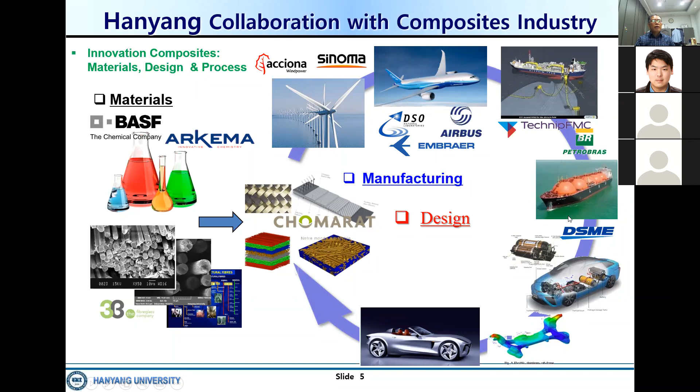Now Embraer has been merged with Boeing. Also, Petrobras is a Brazilian company - a huge company for oil and gas applications - and Technip. These two major companies are typical users of these large, long, flexible risers. They're called risers because they raise the oil and gas up - very interesting structures. And DSME, also Plastic Omnium and Bosch and Hyundai - these are typical examples in industry.

Well, this is just a short list of companies, but you can easily find more of them on the internet.

So here I'd like to emphasize three aspects: understanding materials, understanding design, and understanding manufacturing. In our class, as the name indicates, we will mainly focus on the design of composite materials. But to design composite materials applied to many different applications, we need to understand the behavior of materials and the manufacturing aspects. Otherwise, we cannot fully design. So please understand these three aspects.

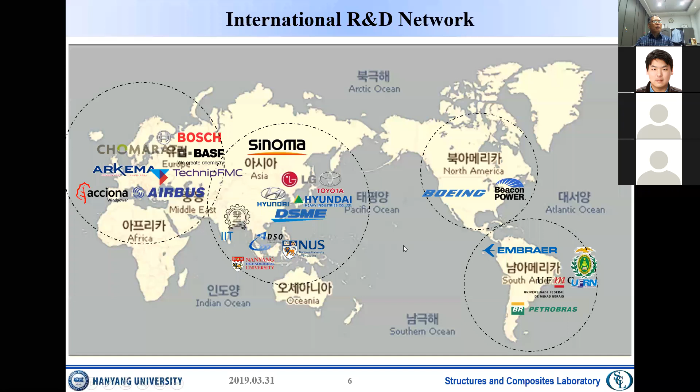Now, globally, I just want to indicate how these companies are located all over the world - Hyundai and some companies in Korea, some companies in Europe like Germany and France, Boeing especially in North America, United States, and Embraer and Petrobras in South America, mainly in Brazil. So I just like to give you an idea of how we work with companies all over the world.

Now in Korea itself, we have many companies covering resin suppliers, fiber suppliers, pre-forming and product developers and manufacturers - each color represents a category. For resin companies, some of the most typical in Korea are Kukdo, Kumho, Kolon, SK, and Lotte Chemicals - these are major chemical companies. In Korea, chemical engineering has been one of the very strong areas in Korean industry, so we can find many chemical companies that can produce engineering plastic applicable to composite materials.

And also as carbon fiber suppliers, Hyosung and Taegwang - Taegwang is a very old company, but unfortunately they didn't continue with fiber. Toray is a Japanese company, but one of the largest in the world.

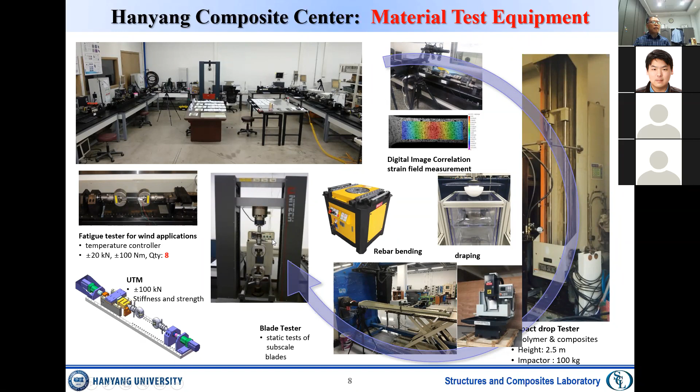We also established some models to predict such behavior, and we do some impact testing using drop weight, some fatigue testing, and also typical UTM machines. And another one is the manufacturing facilities.

The lab has a space of 750 square meters with a very high ceiling height, with CNC machines and a compression molding press. One of the most typical machines is the winding machine, so that we can manufacture pressure vessels by winding, and some infusion process.

We hope to learn these manufacturing facilities one by one, again, to better understand and better design composite structures.

Now, a very important aspect of our composite center - not just for our center, but design simulation tools will play the most important role in the design process, where we need to understand physical behavior, but we cannot design structures every time we design. We need to use tools by understanding the physical behavior. So in that sense, we have three categories.

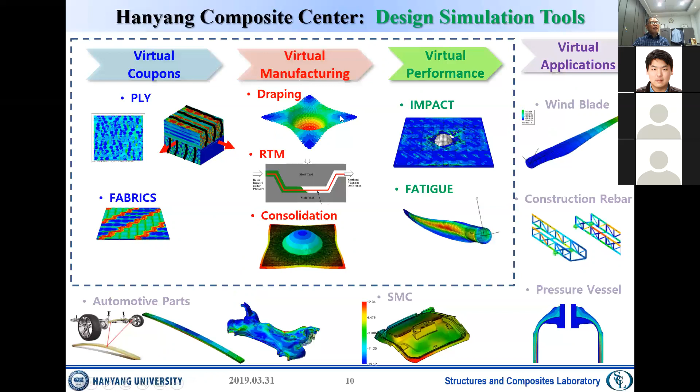Okay, let's move on. We cannot cover all the applications, but I'd like to introduce a few examples using research we have done with industry, from a long time ago, more than 10 years ago. This is one of the most typical applications of composite materials.

This is one of the very interesting and very challenging tasks in composite history. This technology has been developed and transferred to a company called Beacon Power, which is still using this technology now.

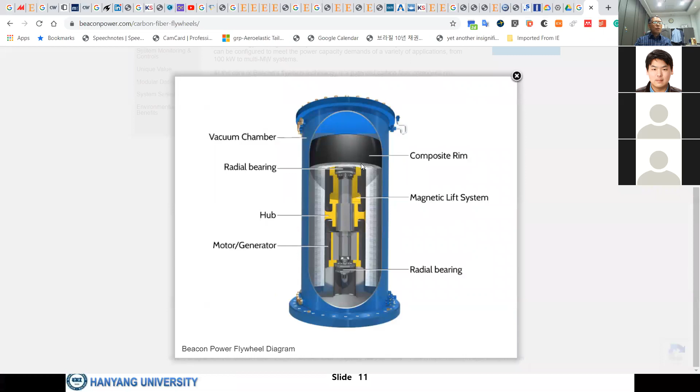Speaking of Beacon Power, I just pulled up their website. As you can see, Beacon Power is using this rotor to store all kinds of energy. It says carbon fiber flywheels, and as you can see, this is exactly what we developed. We transferred all the technology to them, and they are using this rotor to store energy and apply it to grid balancing - meaning that these days all energy has to be balanced.

In other words, let's say they have this kind of huge storage plant - each container has many rotors like that, so it's a huge park, like a big lithium-ion battery stage, equivalent to a lithium-ion battery. So when you have energy, you store it like a battery, and whenever you need that energy back, you can get the energy back.

This is very stable and has literally unlimited life. A lithium battery has a limited life, but this flywheel has no limit.

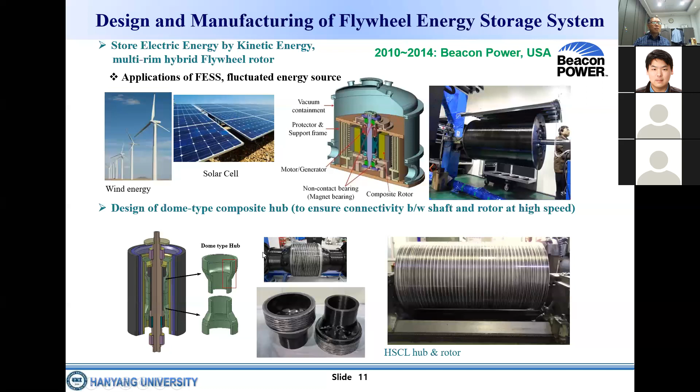So this is how we collaborate with industry. We work and develop a very challenging task so that the industry can use our technology, and they contribute to our society. So our researchers contribute to global society as a result.

There is also another different form of composite called braiding. Braiding is how we braid the fibers, making some closed form like a tube, and these kinds of braided structures are very strong under impact, known as one of the strongest structures in composite structure.

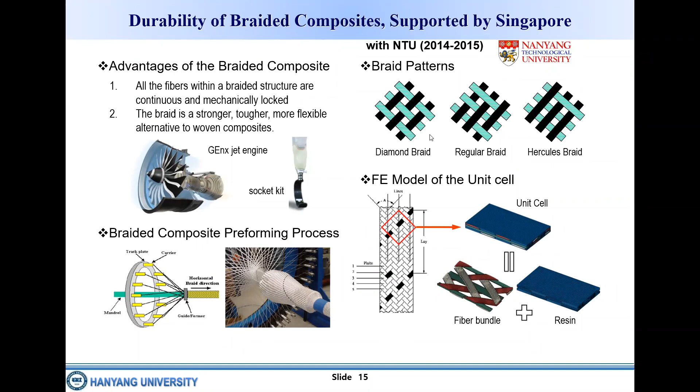I'll find and share later. The main reason why this braided structure is so strong under impact is the way their tows interlock between each other, and there are many different patterns, and these patterns make them very strong.

So we need to simulate and predict the behavior of the composites. That's one of our major contributions. For that purpose, we understand the behavior of fibers and resin and their interface, called sizing between the fiber and resin. All three ingredients play a very important role, so we understand each component and layer.

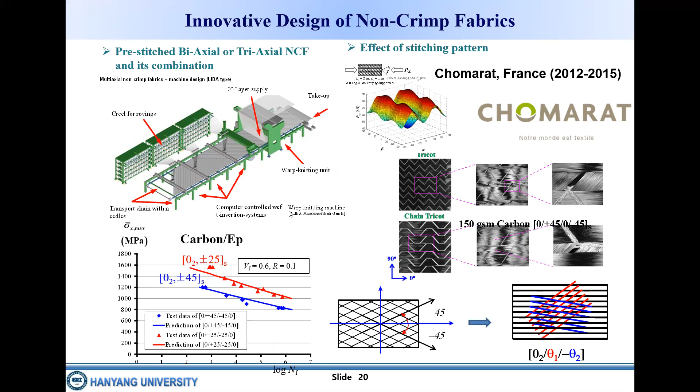Arkema is also a resin supplier, and we've been working with them for many different applications. Also, Technip FMC is developing flexible oil and gas risers, deeper and more cost-effective. The pipe is huge, as you can see. These are very interesting applications, and some Korean companies would like to enter this industry. I hope we have more chances to introduce this kind of structure.

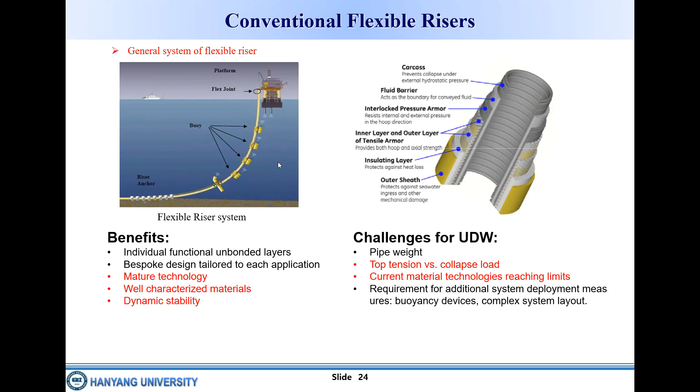Briefly speaking, way down, like 3,000 deep, you can imagine how much pressure from the outside and how much pressure inside. Inside means the gas and oil has huge pressure, and a lot of heat applied inside, and externally a lot of pressure due to the water depth. The oil and gas has to be raised to the top, and this pipe, considered as a long beam, has to be very flexible, but still very strong. There are many different types of form, and computer simulation-wise we have many complicated models, but this way is so complicated with lots of numerical problems.

So we developed an analytical solution and approach, and developed it as a design tool. Speaking of oil and gas applications, offshore applications, we don't only do flexible risers—we have many different applications, like long wires and pipes and some platforms and so on. Again, the main reason we need to use composites is that corrosion-free composites never get into corrosion.

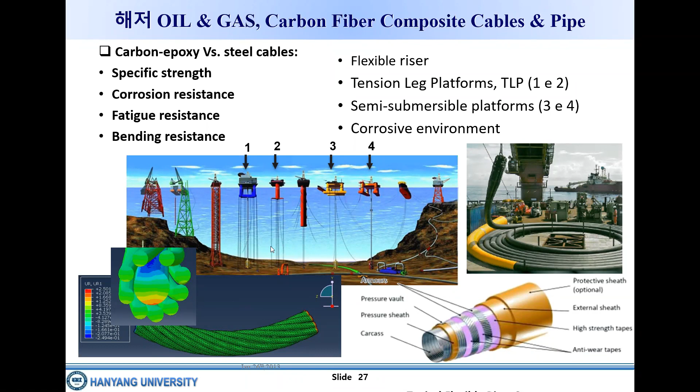Also, one of the interesting applications of composite material is in bio applications. This is one for the spine—our body and spine. We have a disc, and this disc can be easily ruptured, and we feel a lot of pain.

At that time, as a patient, I wanted to develop this artificial disc. This design, as you can see, is made of fibers and made of fiber-reinforced nucleus as a core. Under pressure, this core is expanded and surrounded by these fibers, so it really works like a real disc. This artificial disc at that time replaced existing metal types, and was very successful.

So we had a patent, we started a company, and we raised $40 million, and at that time another 60 million, so about $100 million investment. Very successful applications—I'm very proud of these applications and their contribution to our society. As you can see, you can find more applications.

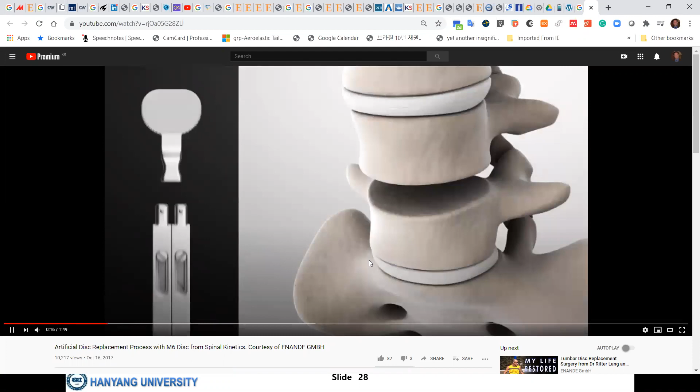Again, you can easily find more examples and applications of the artificial disc, even on YouTube. As you can see, this is your lumbar, and this one is easily replaced. You can measure the size of this disc, and you measure the mobilizations, and there are many different ways to measure that.

Before you insert them, you need to open up, and then you lift up—this is a kind of front side. This is the back—the backyard is here, is the back. This disc is now inserted from here, an anterior approach, meaning the front side. This is the back side, by the way.

This video demonstrates how surgeons operate, how to insert this artificial disc into a real body. You can have some kind of rails so that this disc can easily plug in, and then the bone will grow and fuse top and bottom. This disc insert applies to both cervical and lumbar regions.

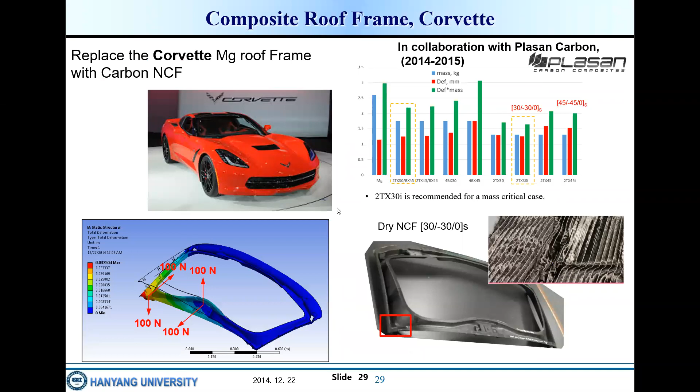Okay, let's move on. Another typical application of composites is the roof top, and we've been also working with Hyundai for many different applications.

When we develop a certain part of the automotive, we need to understand how the whole structure behaves. So when we replace only the roof, we need to simulate the whole structure's twisting and bending behavior, and understand the role of the roof in overall stiffness. The main issues were how we select materials, how we optimize them, how we apply them to the chassis, and durability and cost analysis.

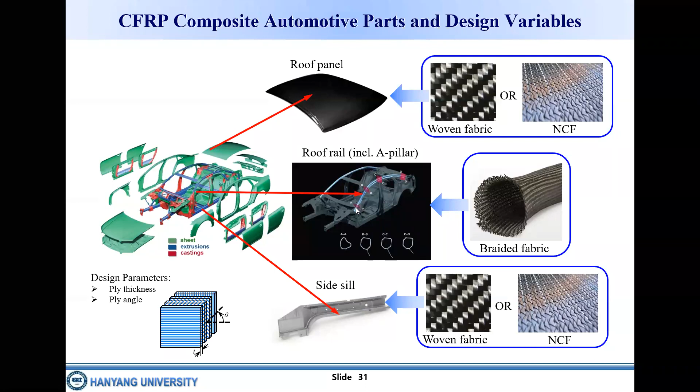These are the roof panels using woven fabrics, NCF, and braided materials as I described. This was Hyundai's first project developing this kind of application and design. Very importantly, when we develop composite parts, we need to consider the cost of the part when it goes into mass production.

So together with technical development, we need to consider the cost of composites. Otherwise, at the end of a successful development, we cannot turn it into mass production simply because of cost. We don't want that to happen. We also apply this to aerospace—imagine how complicated it is. This is the joint between the fuselage and the wing, showing how they are connected: very complicated structures, but also very strong and very light, replaced with composite.

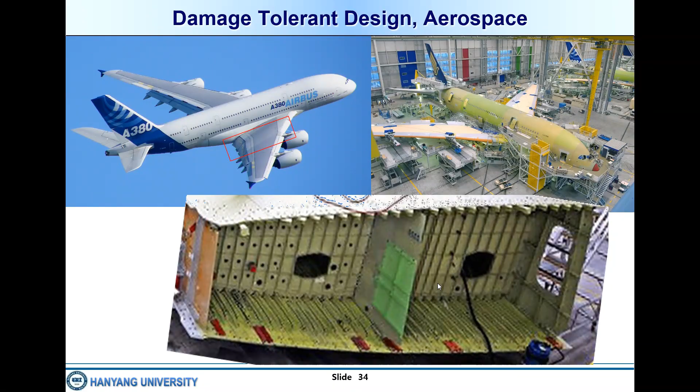These are some of the main applications I wanted to introduce. That's one part of my class for today.

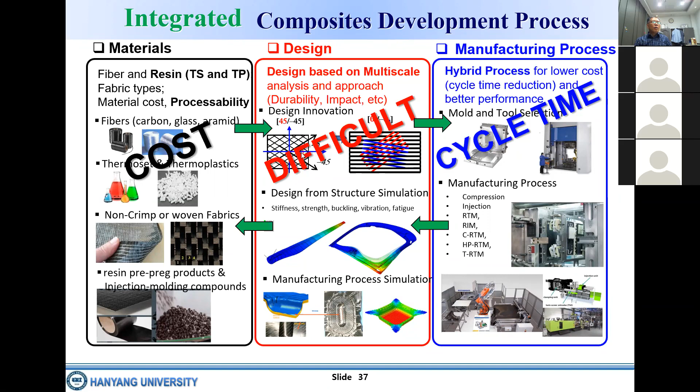Specifically for automotive application, there are major issues and trends. Again, as I said, productivity. Productivity means we need to optimize the process. We used to use the manual process, which simply increases the cost of the manufacturing process. So optimizing to increase productivity is one of the main issues. For that purpose, we can have automatic tape layering, automatic fiber placement, compression molding, injection, and so on.

Recyclability, or eco-friendliness, or being environment-friendly is a really important issue for composites, because plastics are often considered as threatening to the environment. So to make composites eco-friendly or environmental friendly, we have the better choice of thermoplastic, or we better have the choice of recyclable fibers. And similarly, there's TP, or thermoplastic composite - carbon fiber reinforced thermoplastic.

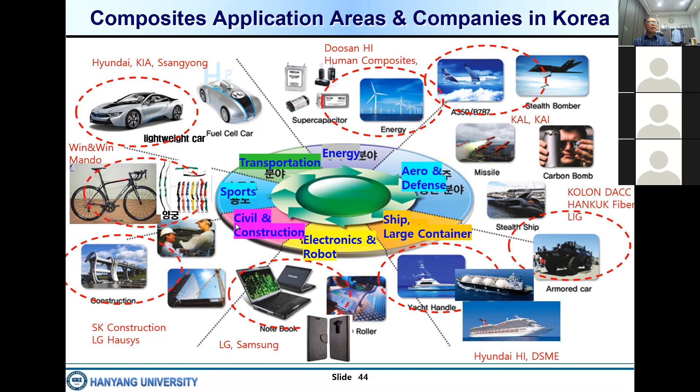Civil construction and sports are important applications of composites. Sports applications are very important because to reach the highest possible performance, considering the lightweight nature of high-performance composites, composites can be the only choice. There are many research areas, and I'd like to select some cases.

These are considered successful businesses in Korea. Hanguk Carbon is a company that produces towpreg or pre-preg. They recently formed a joint venture with the Israel Aerospace Industries to develop unmanned aerial vehicles, very light vertical takeoff and landing aircraft, and a lithium-ion polymer gasoline hybrid engine which can fly for 8 hours.

And Kolon Industries produces aramid fibers. Aramid fiber is a very special fiber which can be applied to bulletproof jackets, and is even applied to flexible risers as well. Kolon is one of the major companies, and they made this aramid fiber very successfully.

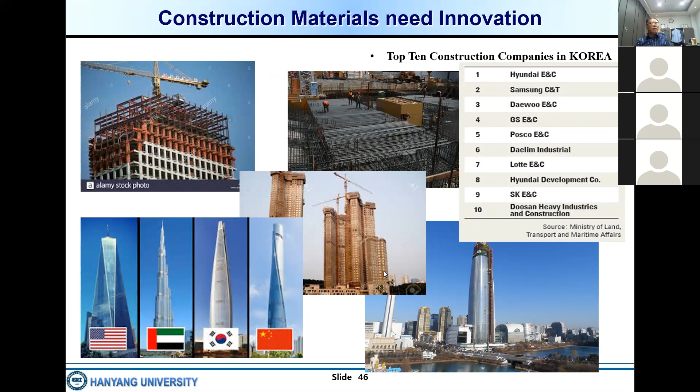Concrete is okay, but steel can be replaced with carbon fibers and glass fibers, and that's why there's huge development of new composite products applied to the construction area. So bendable rebar, replacing steel rebar, is a huge industry application.

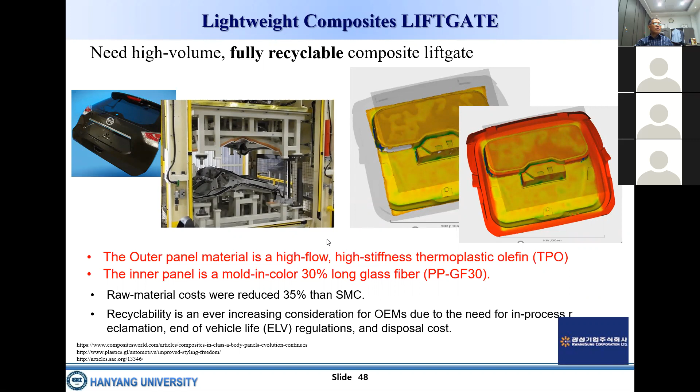And for automotive applications, this is a lift gate - a high volume, fully recyclable composite lift gate. This lift gate has outer panels and inner panels, which can be made of thermoplastic olefin (TPO) and long glass fibers, using a process called sheet molding compound, and sometimes injection, and also chopped prepreg for compression molding.

This composite can be chopped to about 5 centimeters long. Chopped carbons can be easily processed just using a compression molding process. With prepreg compression molding - just prepreg and compression molding - we can create very complicated structures like bikes, suspension arms, window frames for aerospace, and so on.

Not just one process, but also a hybrid process. Hybrid process means that if we want to make a certain structure, rather than using just one process, we make a skeleton part using carbons, creating skeleton structures, and then we inject resin or short fiber, and then we make the final product. Of course, for that purpose, we need to simulate the behavior of structures and simulate the manufacturing process.

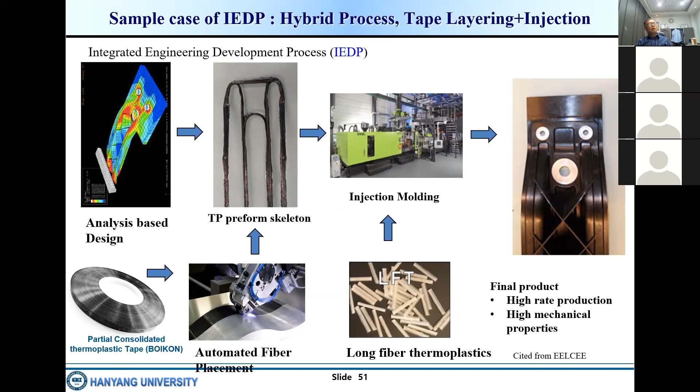So as engineers, we need to understand the trend and how this industry goes together with our technology development. Even though we are working on one area, we need to understand the global trend, especially in this fourth industrial revolution.

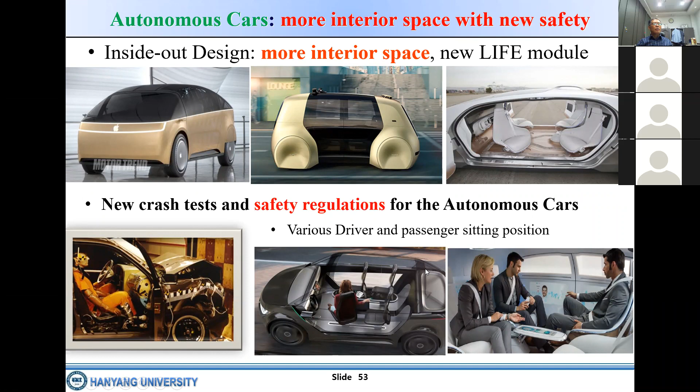Speaking of autonomous cars, as you can see, we have more interior space with new safety issues to consider. It's a huge inner space, because an autonomous car means you don't have to drive - the car itself detects obstacles and drives itself, so passengers can have more time. We can even have meetings, sleep, eat, and so on. So we do need more space.

Okay, one last application I like to emphasize as an introduction to composite materials is the winding process.

This hydrogen tank for fuel cell vehicles is becoming more and more popular, especially considering current technology. Battery vehicles certainly have advantages, but also drawbacks, such as a very long charging period, like 2 hours, and the charging device, like a lithium battery, is heavy, about 600 kilograms. So considering all aspects, fuel cell vehicles are considered the futuristic cars.

In this aspect, Hyundai, Honda, and Toyota are considered among the top car makers. In this application we need hydrogen gas, because the fuel cell simply generates energy using hydrogen gas and oxygen. Oxygen is something we can get from air unlimitedly, but hydrogen gas we need to store, and we need a gas tank with high pressure capability.

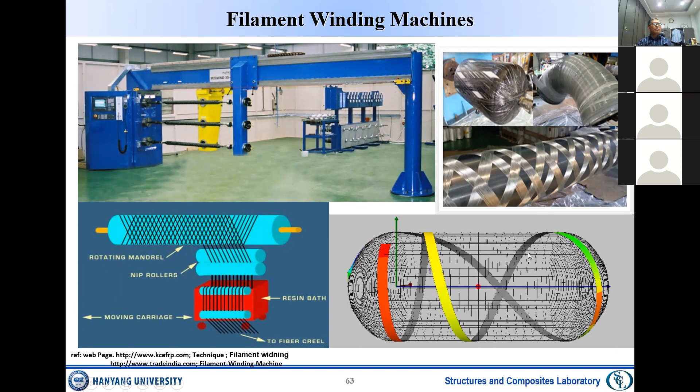Some companies tried braiding composite to manufacture these pressure vessels. They announced it was successful, but I don't know much more of the story. Another one is the RTM process. But anyhow, the point is that they are trying many different efforts to reduce the cycle time, because cycle time is a very important process parameter for reducing cost.

So speaking of the filament wound composite for H2 hydrogen tank, a liner inside the tank acts as an H2 barrier. It's called an H2 barrier because hydrogen gas can permeate into this liner gradually, and nobody wants that kind of permeation. So selection of the liner is very important.

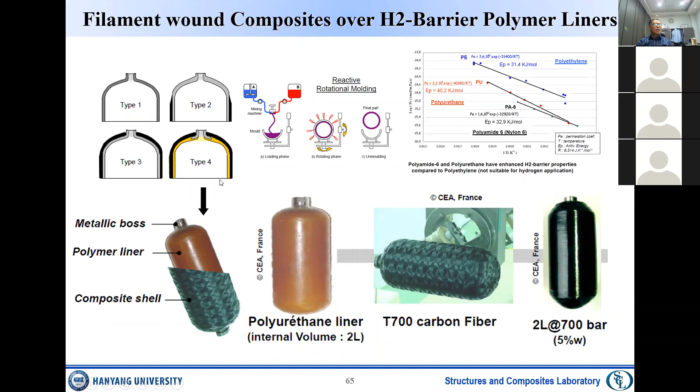There are several choices, and as you can see, PA6 is one choice, and polyurethane is certainly another choice. So material selection for the liner is important.

Again, for H2 thermoplastic composite pressure vessels for fuel cell vehicles, this is not the wet winding process. This is a process called thermoplastic tape winding. This thermoplastic tape is wound over the liner, and this is how we make it.

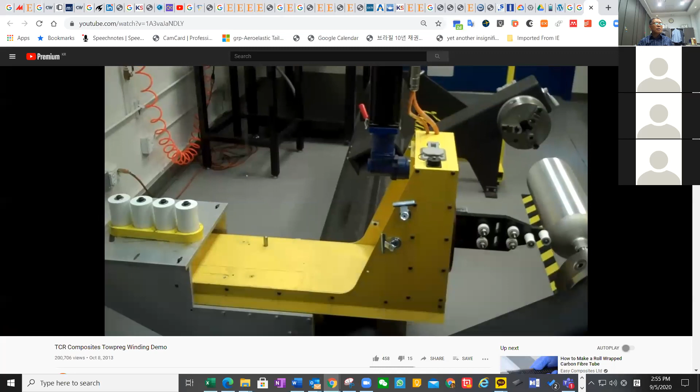This is a very typical process for filament winding, and these are the fibers—sometimes dry fabric, sometimes just impregnated tows—and this is the winding machine. This is a tow preg, where tow means carbon fibers, and preg means resin impregnated.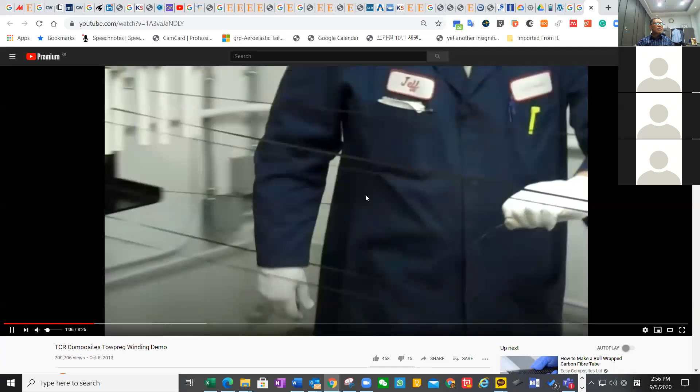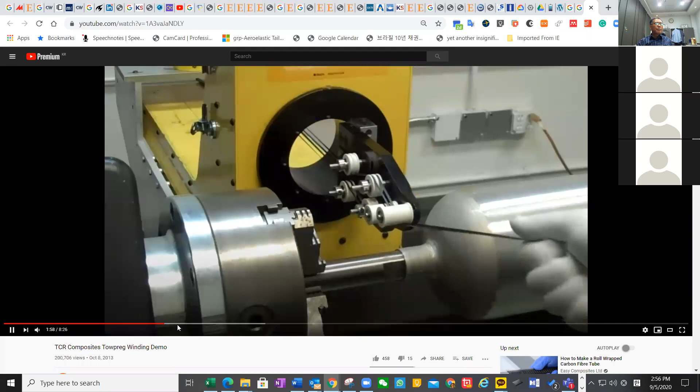So now these tows already have resin in them, and this is just the initial stage. This is a roller with very little friction, and this is also a roller, as you can see. The tow goes over the eye, and this is the mold. This is just the initial stage, and once we finish setting it up, we have the winding process.

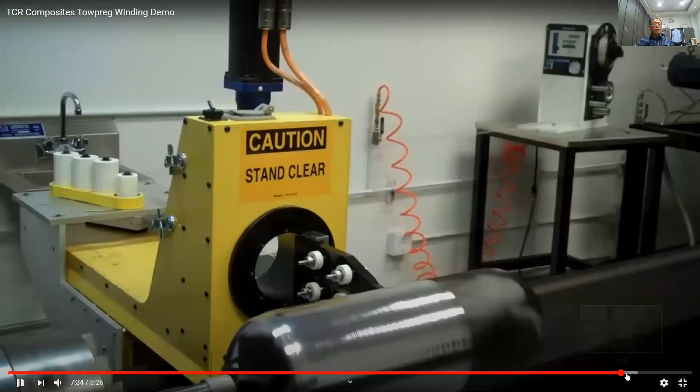Once the winding of the tow is finished, they apply some shrinkage tape so it can hold everything in compaction during the towpreg curing process. Once this is done, this becomes a tank. This is the one we just watched, and we have all kinds of connectors, and on the head we have some protectors. This is now implemented onboard the car, as you can see here.

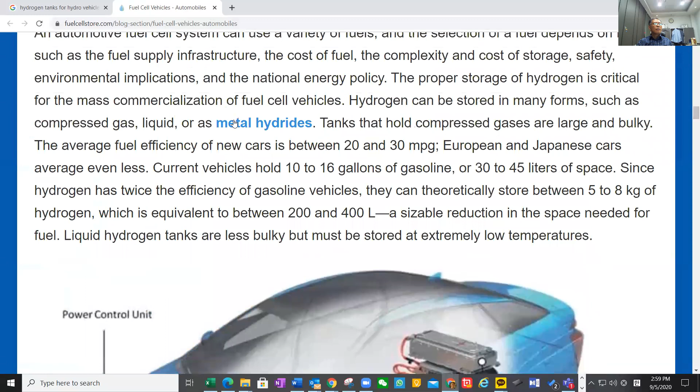This is the typical setup. So this is a tank—we need more than one tank. It could be one tank, two tanks, and sometimes we have three tanks. So this is how we manufacture the hydrogen tank, and it will become very popular.

One thing I'd like to emphasize is that 700 bar is a very typical value for hydrogen tanks. In the cost analysis, carbon fiber has a very high portion of the cost, mostly 60% of the whole cost. So you can see how important it is to understand the role of carbon fibers.

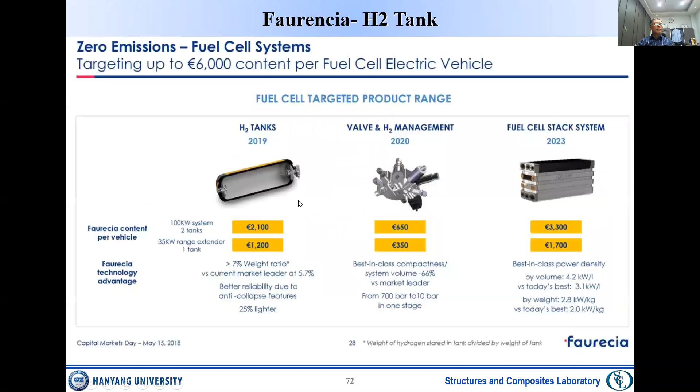That's what I'd like to introduce as an introduction to composite materials.

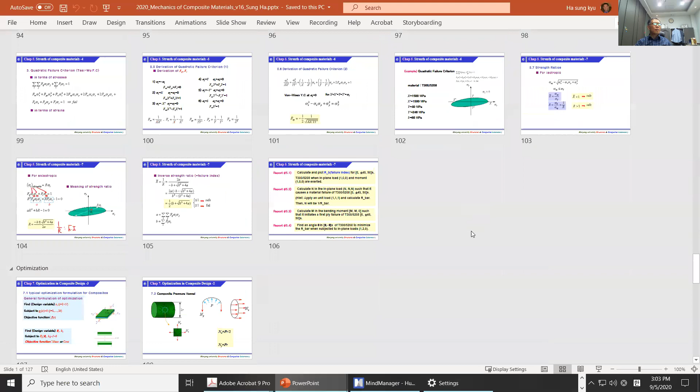Okay, now I'd like to cover a little bit of the main course. I'm sure you already have some coursework lecture notes and PowerPoint. I already distributed these slides, which we will cover in this course. We'll also develop certain simple design tools, and we'll review some design tools we developed ourselves. So in this class, I'd like to...

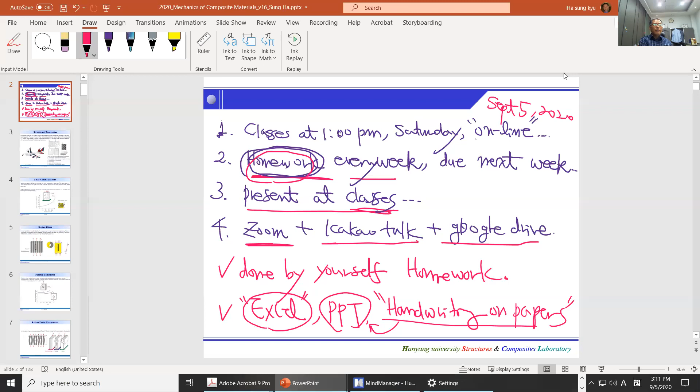Okay, so let's go a little more deep into understanding composites. So, structure of composites, or composite structures.

Composite materials, as discussed, are widely used in aerospace structures, passenger airplanes, cars, and sporting goods, which we already went through previously. This includes the use of aramid fiber reinforced plastic, carbon fiber, hybrid fibers, and all kinds of fiber. So basically, the important point here is the fibers plus the resin - these are the most important ingredients.

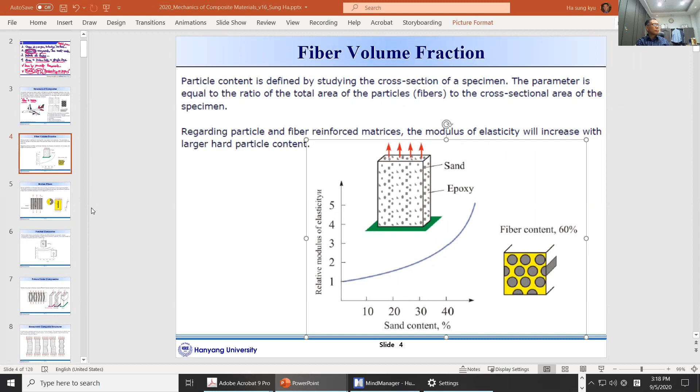Now imagine there are some broken fibers. What will happen? Let's say the fiber is broken and surrounded by resin. The broken fiber certainly cannot take over the load. In that case, the resin surrounding that broken fiber will transfer the load to adjacent fibers. So even though some fibers are broken, globally we don't have much problem because all the load will be carried by the adjacent fibers.

That's one of the main reasons why we prefer to use fibers. Billions of fibers make these structures strong and more durable.

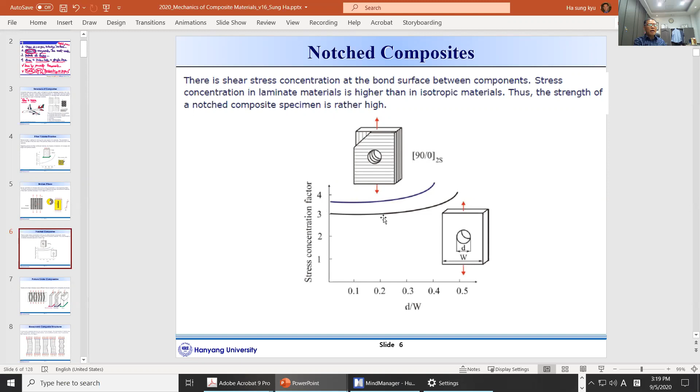Notched composite is when we connect composite in aerospace or other applications, we need to make a hole in the laminate. We better need to minimize the number of holes, but in many cases we cannot avoid them. So understanding the effect of the hole in composites is important. Stress will certainly concentrate, and the stress concentration factor will reach some value like 3 or 4, depending on the layup sequence and geometry.

Also very important is the compression behavior of a composite. Under compression, the behavior is very complicated and relatively weak compared to tension behavior. As you can see, under compression, fibers can easily buckle, bend, and layers can delaminate, leading to very complicated failure behavior. So we better need to minimize situations of compression, but again we often face that case.

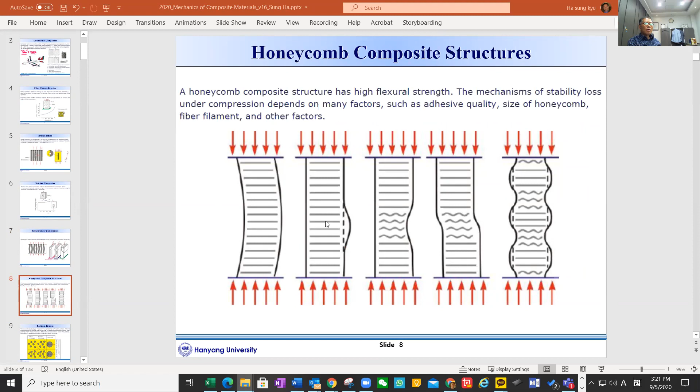Also, honeycomb composite structures can debond from the core. This is one important issue. I just want to go through some major examples—this is not all, but I just like to give you an idea of the kind of real problems in composite structures.

Residual stress means that when we manufacture the composite, the fibers and resin have different thermal processes, so the cracks and damage can be very different depending on the material properties of the resin and fibers. So residual stress differs because of different thermal expansion—we have thermal residual stresses.

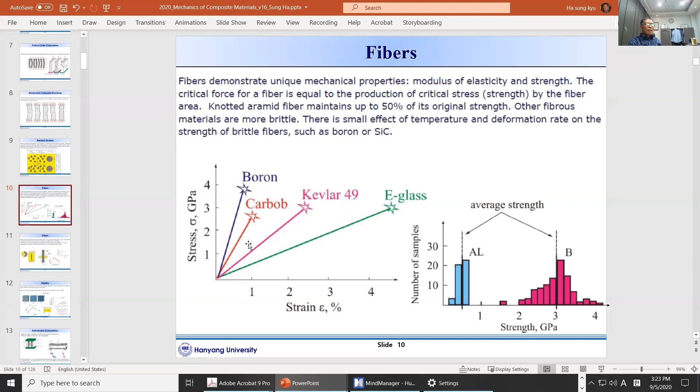Now this is a very important slide to help us understand fiber behavior. We have many different types of fibers—say boron and carbon, sorry, it has to be carbon, and Kevlar is aramid fiber, and e-glass—each has its own strain and stress curve. Of course the stronger the better, but strain at failure is also important. This value isn't so accurate, but I'd like to emphasize how important stress and strain are. We'll get to a more correct slide later.

Now for fibers, because of short fiber or broken fibers, the shear stress between the fibers and resin is important. This is the fiber, this is the resin, and there is some shear load.

This can be an important role. Rigidity means that fiber directional property is much stronger than matrix directional properties.

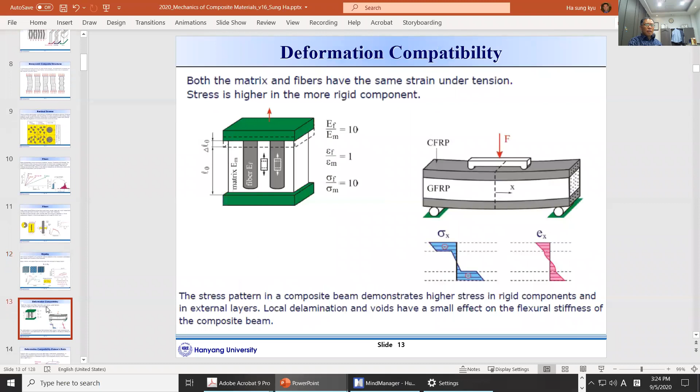So we can have many different types of stress strain curve, and deformation compatibility we need to understand. We will cover more in detail, but deformability is important because all the fibers and resin are deforming together. That understanding is important. And deformation compatibility is one called a Poisson's ratio.

Let's say we have certain materials, and under tension, there is a contraction in the transverse directions, and each ply with a certain angle has to deform together. Understanding that is a very, very important rule.

I'd like to just take 1 second, please.

Before we go into detail of the mechanics and design of a composite, I like to emphasize again, why carbon composite is so important for transportation.

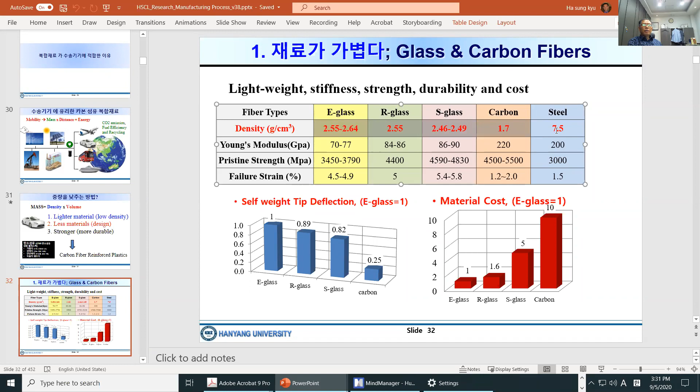So back to here, why reduce mass? Well, reducing mass is to save energy. So to reduce mass, we need to use low density materials.

Now, the next one is how to reduce, how to use less material. Well, this is the most important characteristic we need to understand in design of composites. Okay, please pay attention, this is very important.

If it's isotropic or metal, the thickness is just uniform, and design-wise we don't have much choice. We, the designer, have only one choice of choosing the thickness, right? Only the designer can choose or change the thickness.

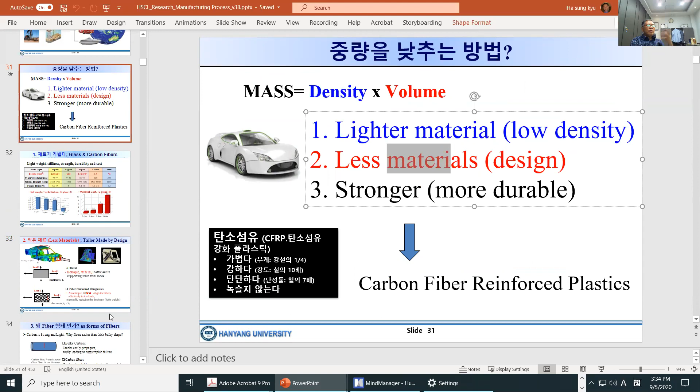So in short, using the anisotropy, we can better align the fibers effectively to support the load. Eventually we can reduce the thickness, and eventually we can use less material. So if we use composite materials, this is the way we can reduce the amount of material.

Now the last one, a very fundamental question we need to understand: why fibers? Why fiber types? Why not just all carbon? Well, understanding the form of the fiber is very important. Why so thin, such a very small fiber? This is the question we need to understand, we need to be able to answer.

Carbon fibers are strong and light, but why fibers rather than a thick, bulky shape? Well, imagine these fibers are very big, very bulky, very large in volume and size. Then the problem would be if there is a crack, the crack can easily propagate, the structure can easily collapse, or catastrophic failure can happen. So a bulky type structure is not a good choice.

Again, the reason is the crack can easily propagate. So that's why very small carbon fiber, with a very small diameter, means that if there is a crack there, the crack will just stop and exist only in that fiber, at that location. So this is very important: the crack of each fiber can be localized.

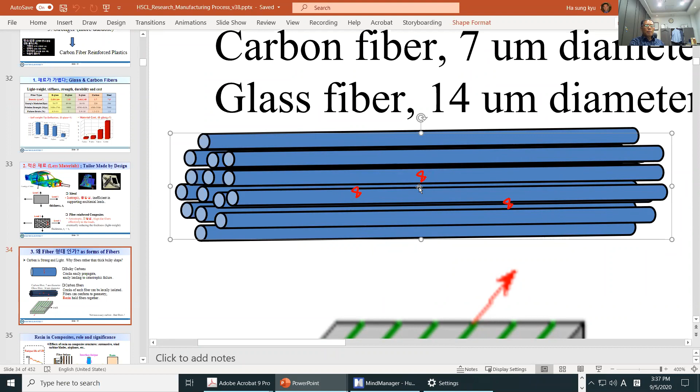Fibers can conform to geometry, and resin can hold the fibers together. So as I explained, once we have a crack there, this fiber can no longer take load, but it's okay because the diameter, the size, is very small, and all the load will be transmitted by the adjacent fibers through the resin system. That's the role of the resin. So if there is a crack, no problem—the crack will stop there, and the other fibers will take over most of the load.

Now here, the resin plays a very important role. Resin holds the fibers together, and resin transfers the load from one fiber to the others. So understanding the role of the resin is as important as understanding the fibers. Again, in composites, the role and significance of resin is as I explained: once a fiber is broken, the adjacent fibers take up the load through the resin system, and the interface between the fibers and resin system is very important. And so, these are the fibers.

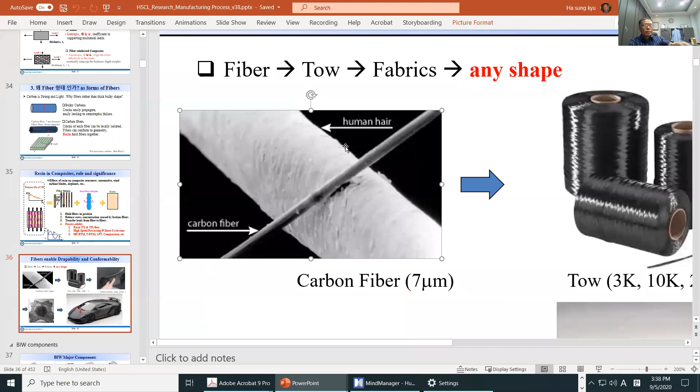Okay, this is the fiber, carbon fiber. You can see how small it is compared to a real hair, your hair, human hair. And this is the size of carbon fiber, 7 micrometers.

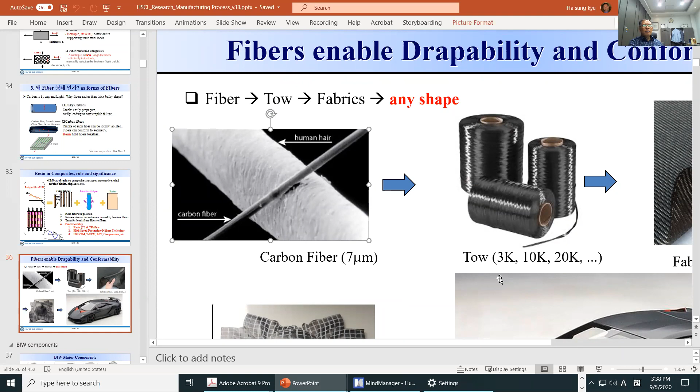So theoretically, the smaller the fiber, the less chance of crack propagation. That's why they prefer the fibers to get smaller and smaller. And 3K means 3,000 fibers, and 10,000 fibers—this is how they distinguish the tows. Using that, you can make very different fabrics and draping, make a shape, do a resin transfer, and make a structure as you wish.

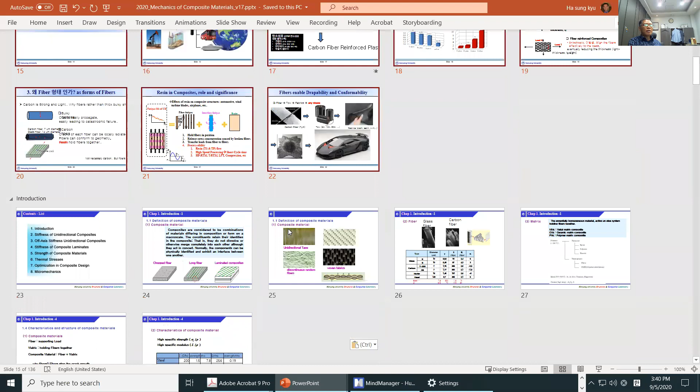Okay, so next is the sections, and we will briefly cover, step by step: introduction, which we already covered, understanding stiffness and laminate, strengths, thermal stress, design, and micromechanics. After that, we will go through several design tools and understand how we design using these tools, and that's how we'll cover the whole structures.

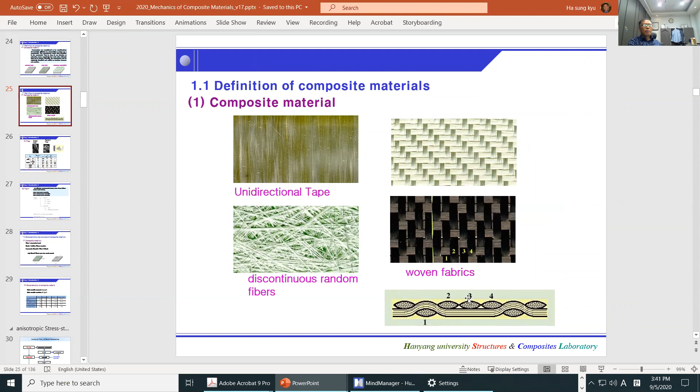And again, this is what we already covered: chopped fiber, long fiber, and laminate composites. Composite is considered to be a combination of materials, mainly fibers and resin system. The unidirectional tape or unidirectional fiber is just one direction long fiber. This is the discontinuous random. And this is the fabrics, woven, and also braided, which can be very different forms.

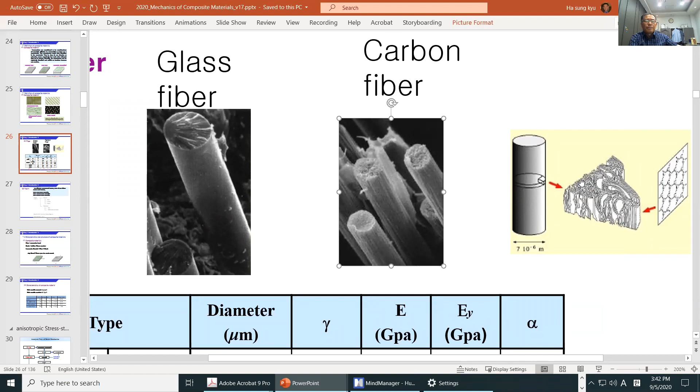And again, as I briefly introduced, this is glass fiber, and this is carbon fiber. Very microscopically, the carbon fiber has very thin layers, and each layer has carbon bonds, and each one is very strong, layer by layer. Whereas glass fiber is isotropic along the glass direction, fiber direction, and transverse. So glass itself is isotropic, but carbon fiber itself is anisotropic. Carbon fiber is strong in the fiber direction, but the transverse direction is relatively weak. That's understandable if you look at the fiber structures.

So the values are a little different, not unique, depending on the manufacturer and so on, but overall the carbon fiber density, gamma is density. Diameter is 7, and it's about 1.7 versus 2.5 - that's the one you need to remember. Carbon is about 220 gigapascal, and this is about 70 - as you can see, transverse-wise it's very weak. Well, this is the wrong value, I have to update.

So for glass fiber, the fiber direction and transverse direction are the same because it's isotropic. But for carbon fiber, they are very different.

Okay, so here, matrix has many different types. A typical one is polymer, thermoset, and thermoplastic. Thermoset is the one where the material gets hard, and we need to understand the fundamental behavior of thermoplastic and thermoset. We will cover this next week, but it is important.

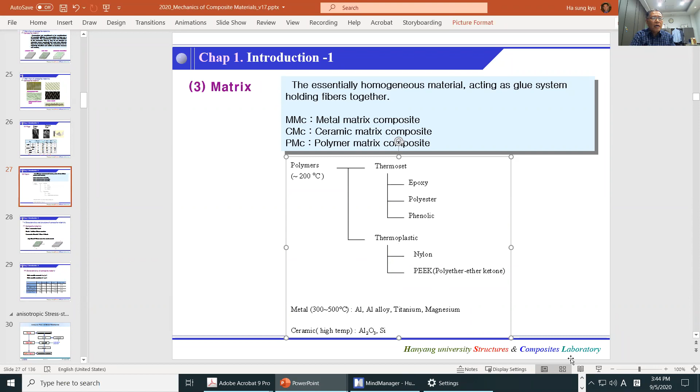And this is the one I just explained, the fiber type. With the fibers, a crack can be stopped very easily. And this is, again, the material properties.

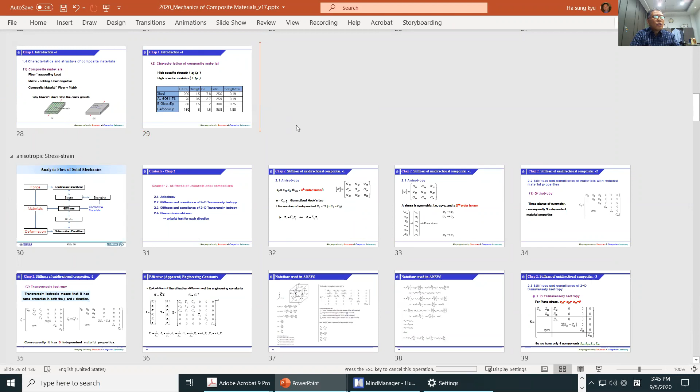And as I mentioned, I'd like to cover more about thermoplastic versus thermoset, which is very important, especially for the manufacturing process and especially for the design process. This is an important point, so I'd like to cover this aspect next class.

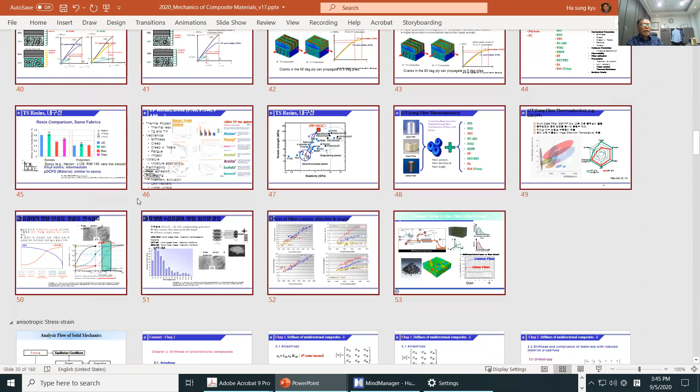Okay, so then we will go on to the mechanics. That's the one I would like to cover today.

And this is again the online class. It's maybe inconvenient, but if you are familiar with this process, online class is not so bad. You can sit anywhere, take a course the way you like. We can cover many subjects, directly use the internet, directly use many references, and easily share the screen. So in that sense, the online class can be better than in-class.